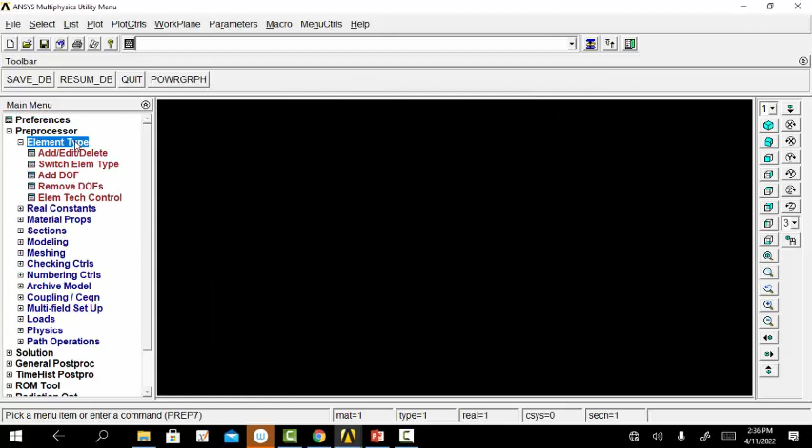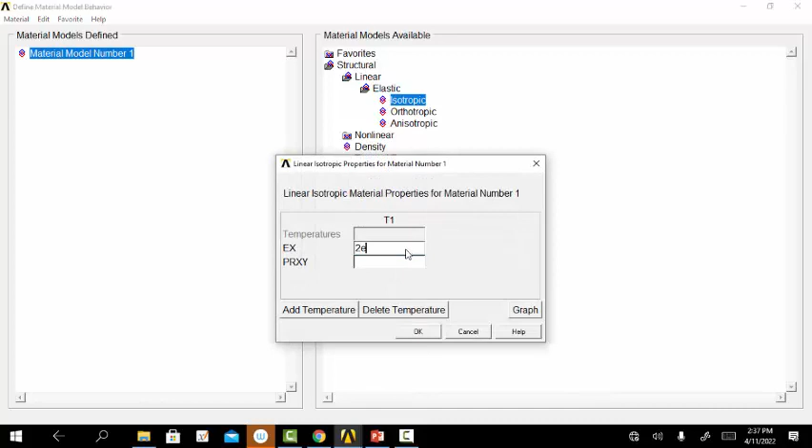First, it is a structural problem. For element type, since the truss element is formed by combining one-dimensional bar elements, the element type has to be selected as link. Material properties, material models, structural, linear, elastic, isotropic. The Young's modulus value is 2 into 10 power 11. Then sections, link, add section ID 1. So 10 power minus 3 meter square, that is 0.001 meter square. Then modeling.

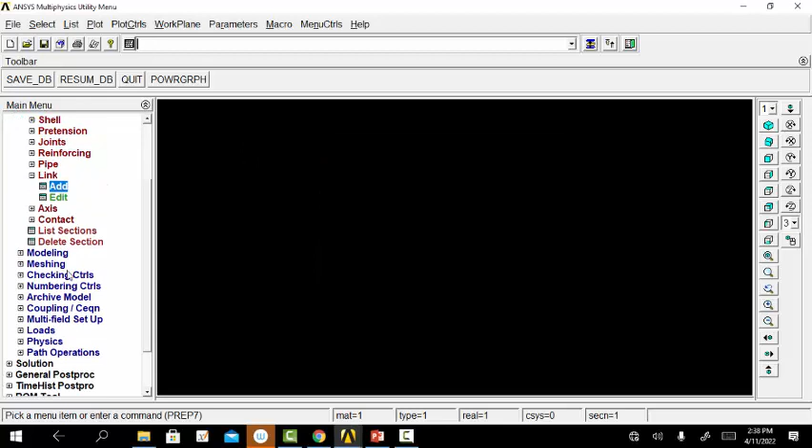We can model the truss element using nodes and elements. So nodes, in active CS. We can set the coordinate positions, considering point A as the reference, so its coordinate position is 0, 0. The length of each element is 4 meter, so these are 4, 0, 8, 0, 12, 0 and 16, 0. The height is 3 meter, so the coordinate position for point B is 4, 3. This is 8, 3 and this is 12, 3.

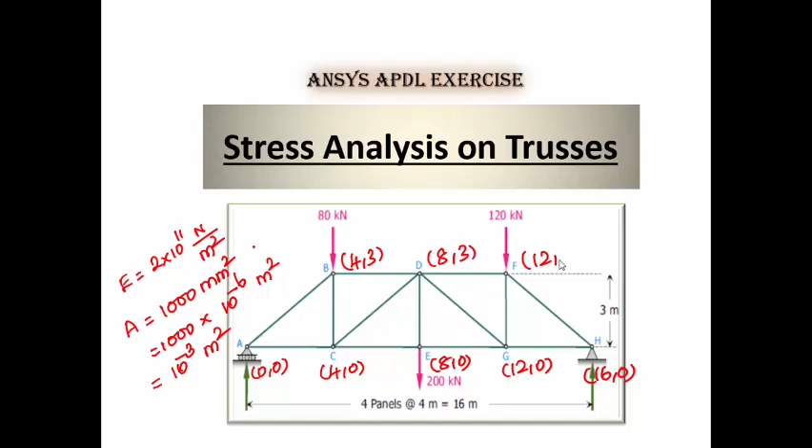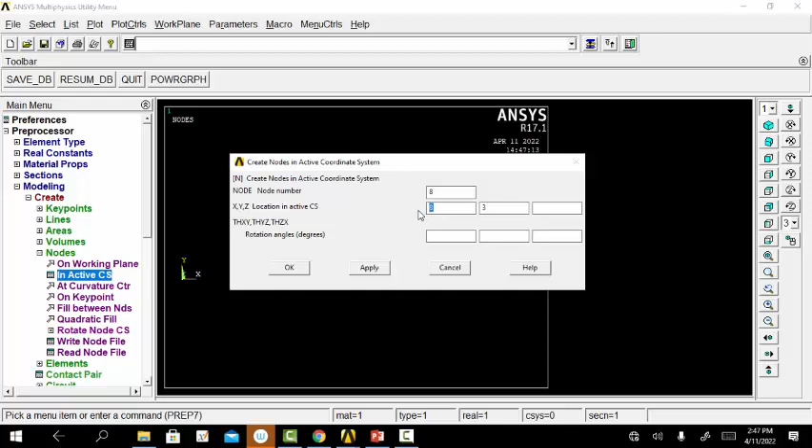Node 1 at 0, 0; node 2 at 4, 0; node 3 at 8, 0; node 4 at 12, 0; node 5 at 16, 0. The next point is nodal point 6, that is 4, 3. Then the 7th nodal point has the coordinate position 8, 3, and the 8th nodal point has the coordinate position 12, 3.

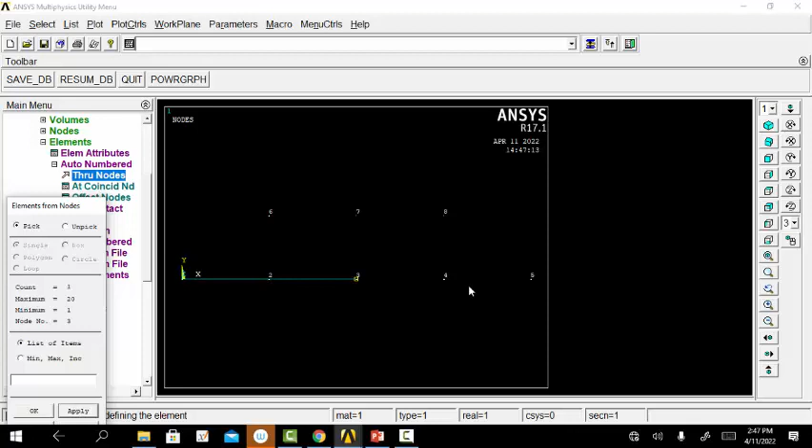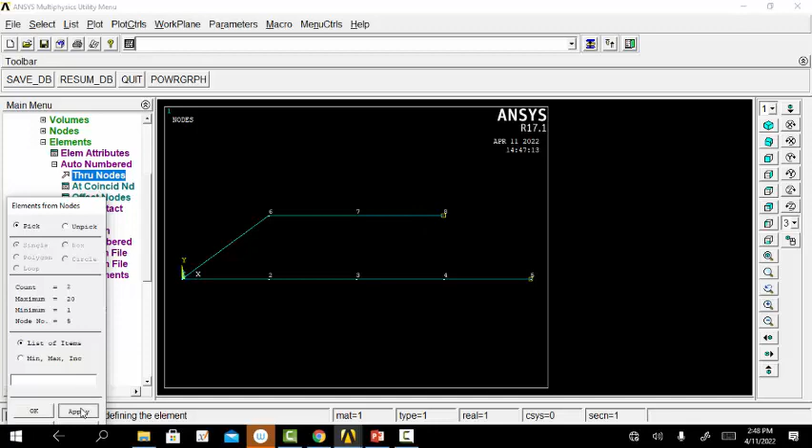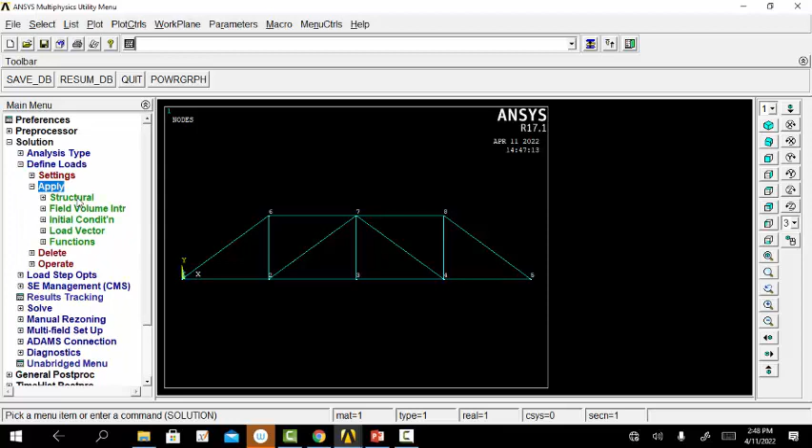So we can join these nodal points to define the given truss element, auto numbered, through nodes. We can join 2 nodal points using elements. Now we have modeled the truss element. Next we have to define the boundary conditions. Go to define loads, apply, structural, displacement, on nodal points.

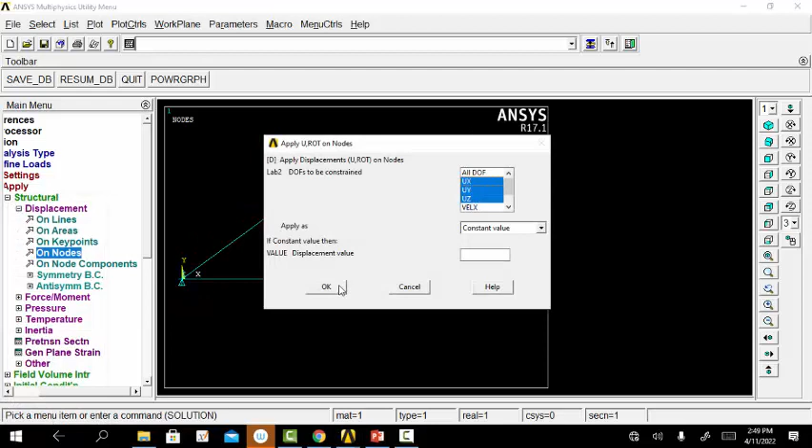Here in the problem a roller support is given. It can move along the x-axis, so arrest UY and UZ. Then at this nodal point a hinged support is provided, so arrest all the displacement degrees of freedom. Then loading conditions. At this nodal point an 80 kilonewton load is acting in the negative y-axis direction, so minus 80,000, force or moment on nodes.

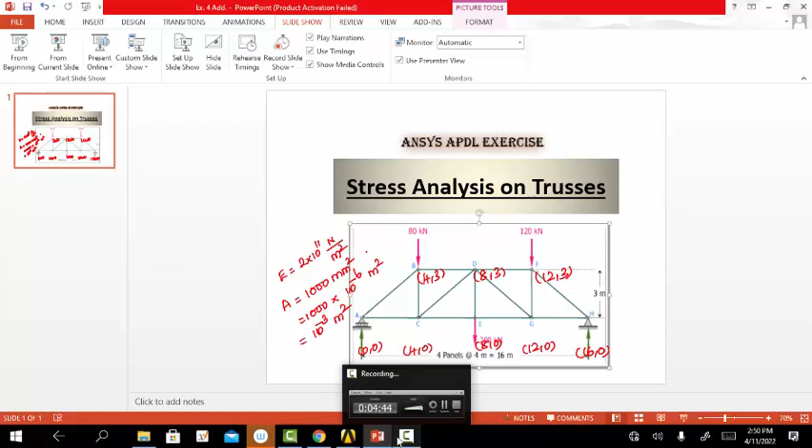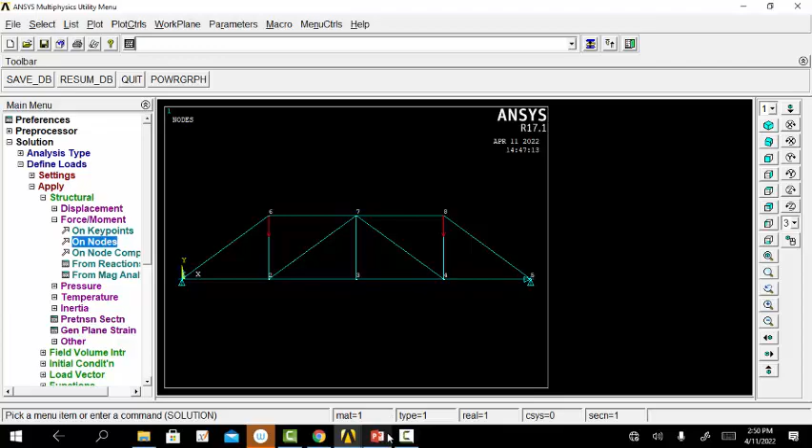Select this point. FY minus 80,000 Newton. Next, at this nodal point a 120 kilonewton force acts in the negative y-axis direction, so select this point, FY minus 120,000 Newton. Next, at this point a 200 kilonewton force is applied. Select this point. 200,000 Newton. So now we have completely modeled the given truss problem.

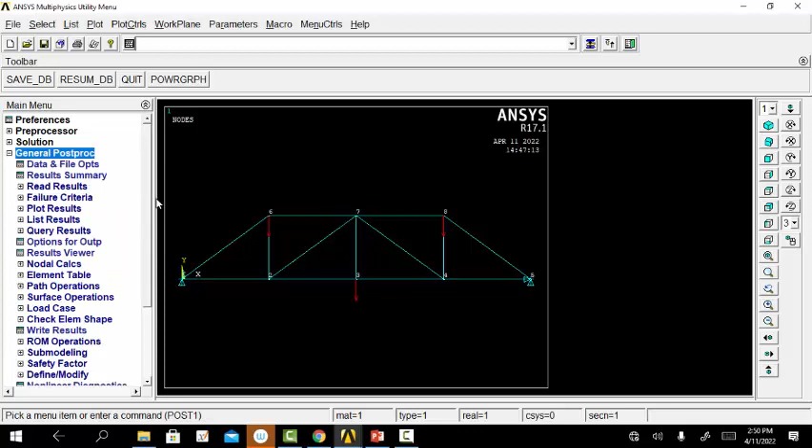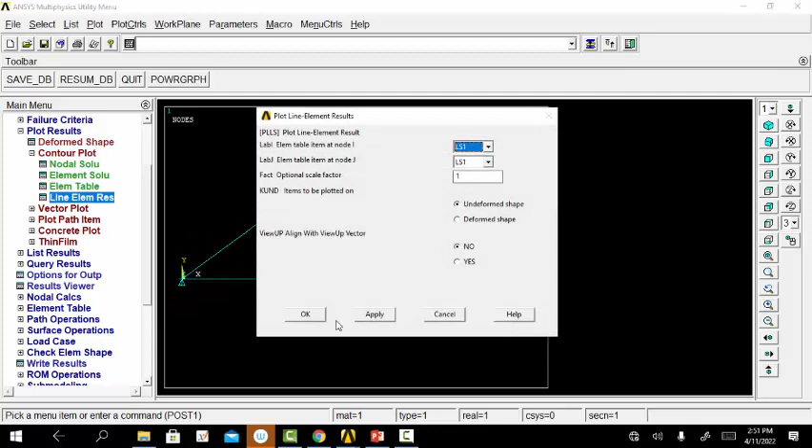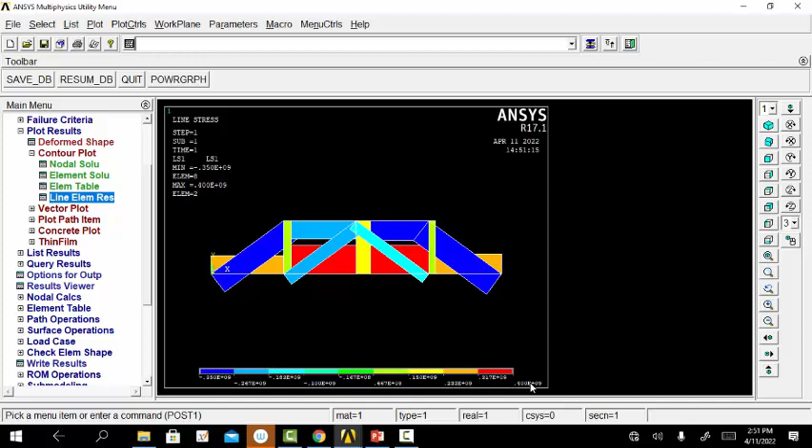Now we can solve the problem using the current load step option. Solution is done. To read the results, go to general postprocessor, element table, define table, add. We know that the sequence number for the axial stress induced in the element is LS1. Close. Go to plot results, contour plot, line element results, LS1. This is the plot of axial stress induced in the truss. The maximum axial stress induced is 0.400 into 10 power 9 Newton per meter square, that is 400 megapascal.